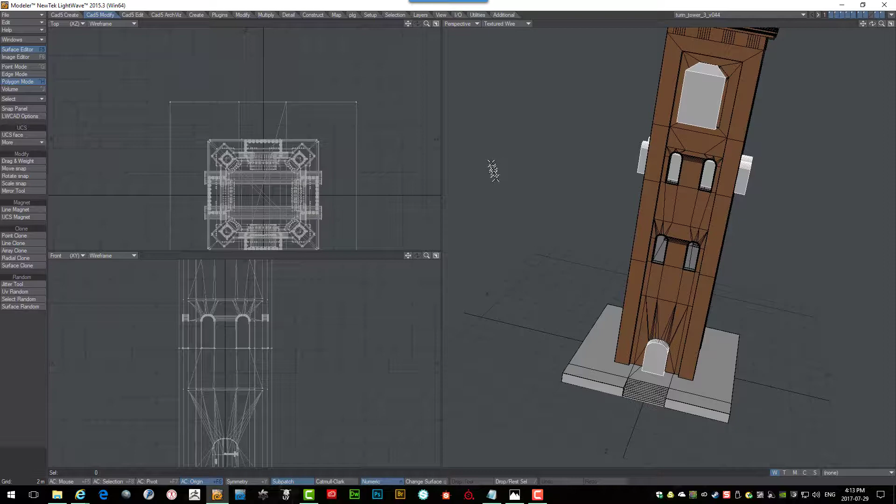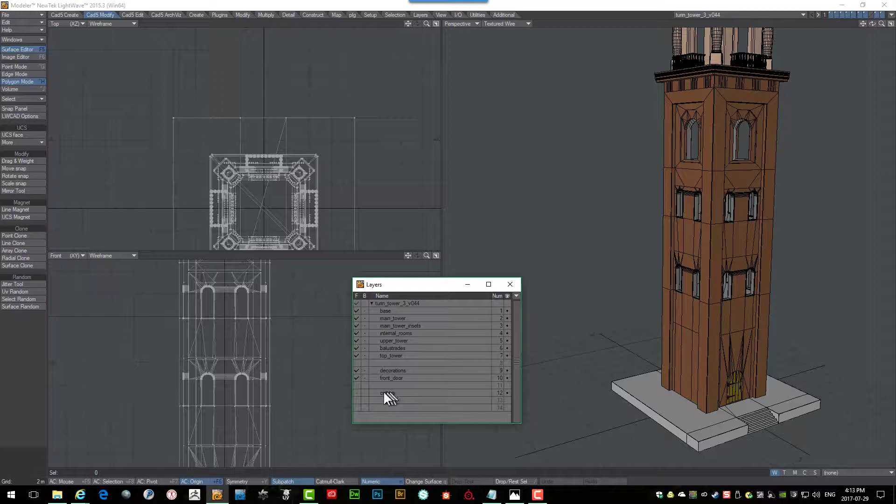Normally I work in the quad view, but for the display purposes of this video, I'm going to have the right side being a much larger vertical view here. And I'll bring my layers window over and turn off the cutters layer. So for those of you that don't know how Lightwave works, you can have these separate layers, very much like Photoshop, and we can cut pieces out of other layers using another layer. So I like to keep a layer of just my cutting objects, and I'll keep them around until I'm finished with the model and then get rid of this layer.

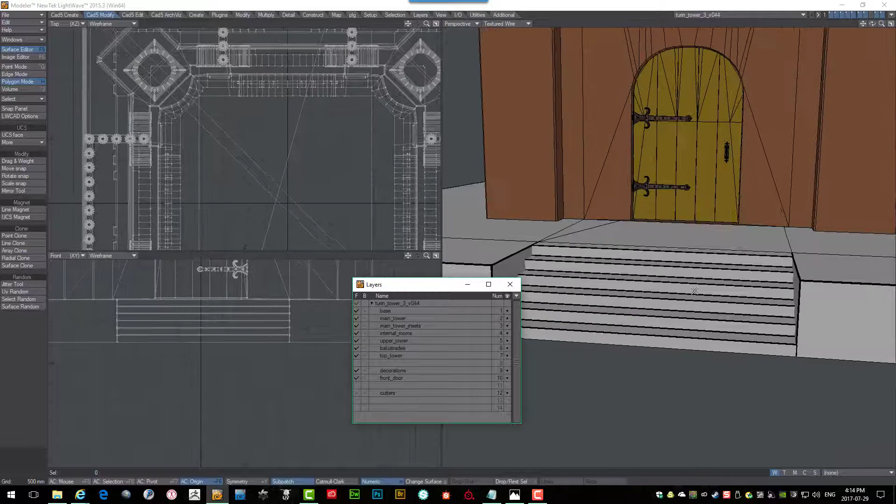So the base I just threw in there for kicks and grins. This is not faithful to the real world bell tower by any stretch of the imagination. The bell tower actually sits on the ground directly and has no base, and it doesn't even have a front door. So again, I'm taking a lot of liberties here. This base was primarily just to test the LWCAD stairs feature and the LWCAD rounding feature. So I've got these edges very tightly rounded, in fact far too rounded in my opinion. If I keep this at all, I'm definitely going to redo it and not have as many polygons here. But I digress.

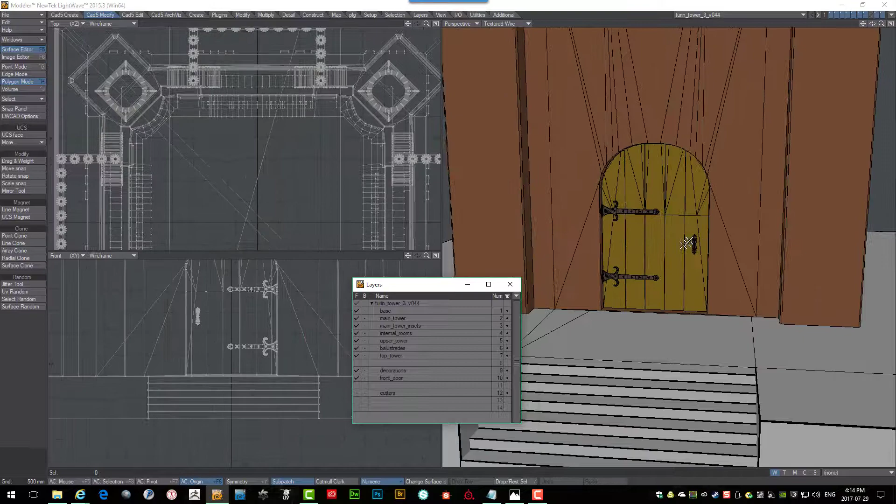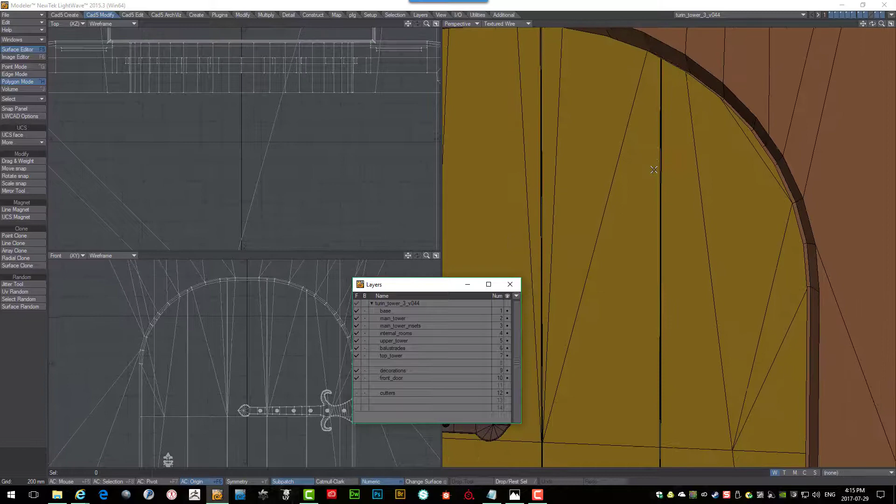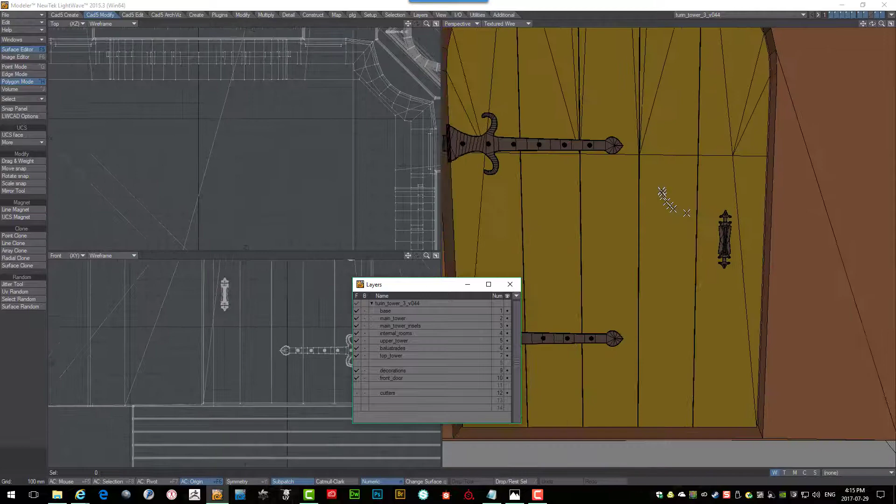The door was a fairly recent addition, just about a week and a half ago I've been working on this. Still needs a little more love and attention, but I did get a little extravagant here. If I zoom way in, this is actually modeled grooves. And I probably should just do a normal map when I do the texturing to get the grooves of the wooden planks in there. That would have saved a fair bit of work and certainly some polygons. But I've kept the grooves in there for now. And the door handle here and the strapping for the hinges has also increased the poly count fairly heavily.

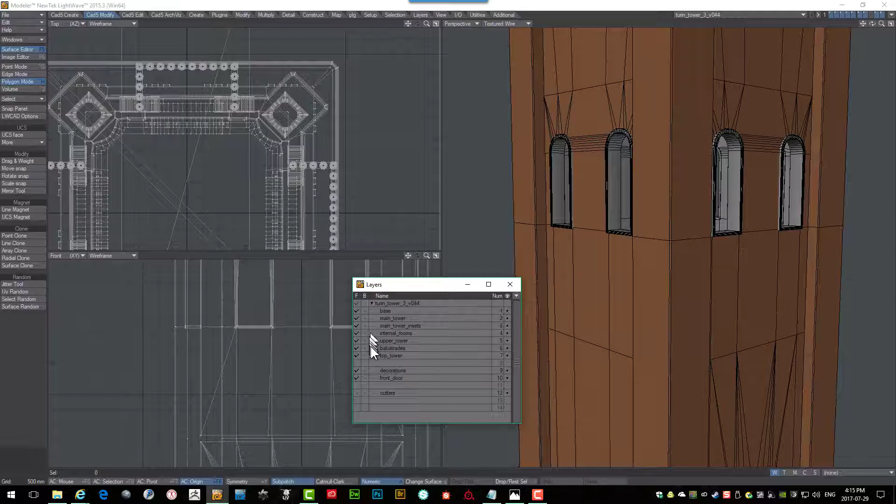So just moving up the tower. I don't know what the insides of the tower actually look like. For all I know, it's completely hollow. But in my model, I've built some internal rooms. And the idea is to actually put in some staircasing going up through these rooms until we reach the top. So we'll see how that works out. If that turns out to be too difficult, I'll probably just get rid of the rooms and just have a single staircase inside a hollow tower. But whatever, we'll see what happens.

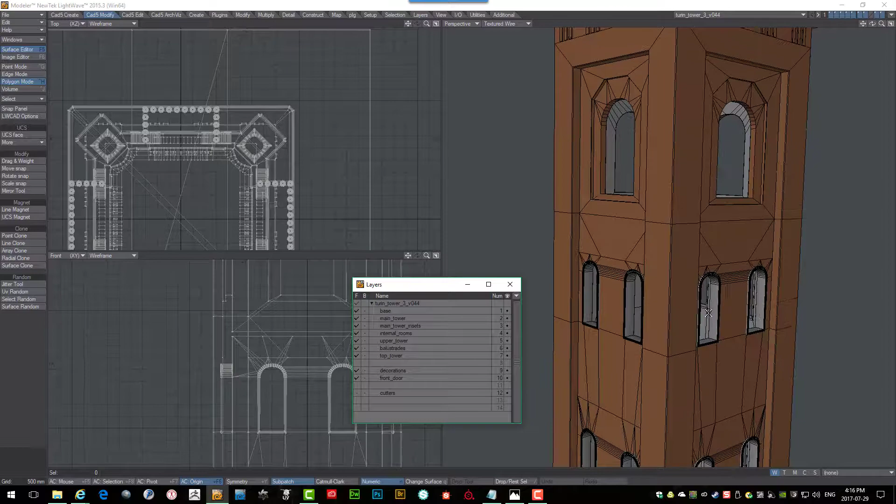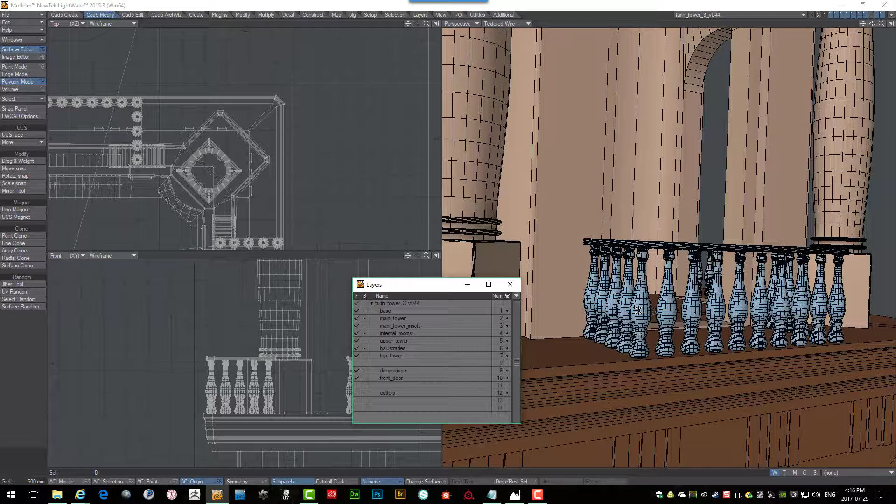Lately, most of my work has been here in the top part of the building. So I recently added some balustrades and railings. In my photo reference material, I found out these balustrades need a little more work if I'm going to more closely match the real world. So we'll see if I get around to doing that this weekend.

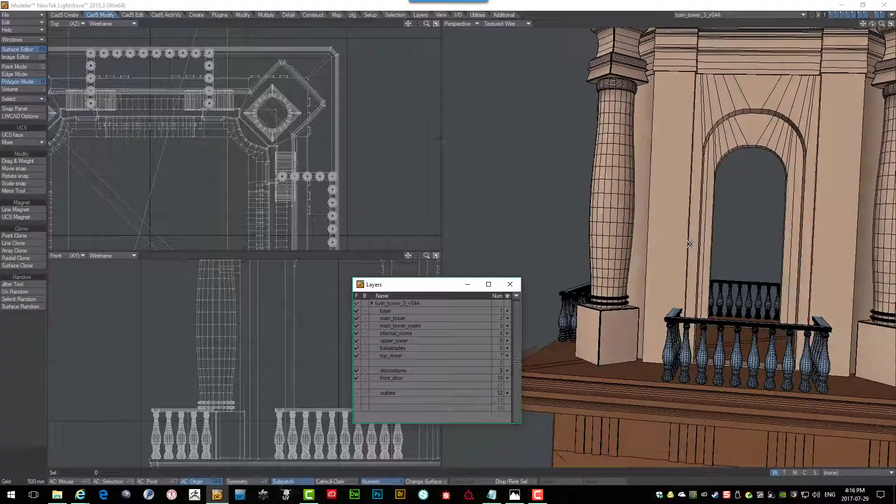Inside this large area here is where the bells and their support structures are. And I've had a heck of a time trying to find some good photo reference for that. So I'm not too sure how I'll go about modeling that.

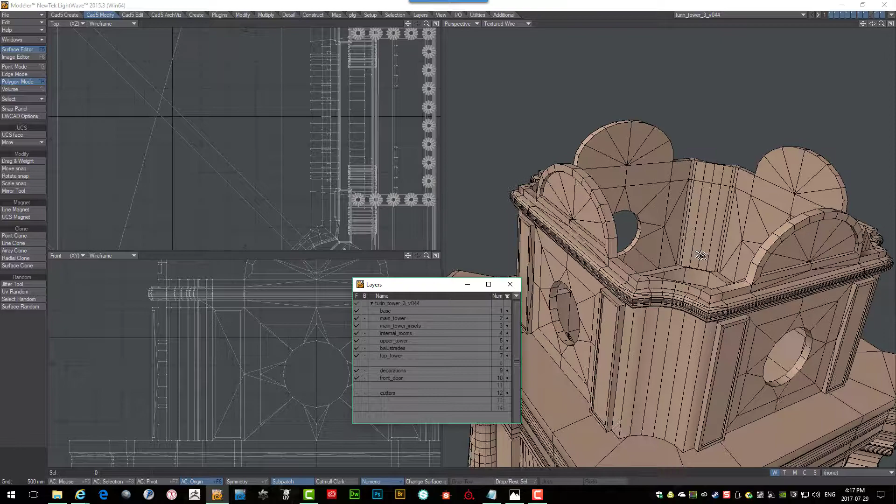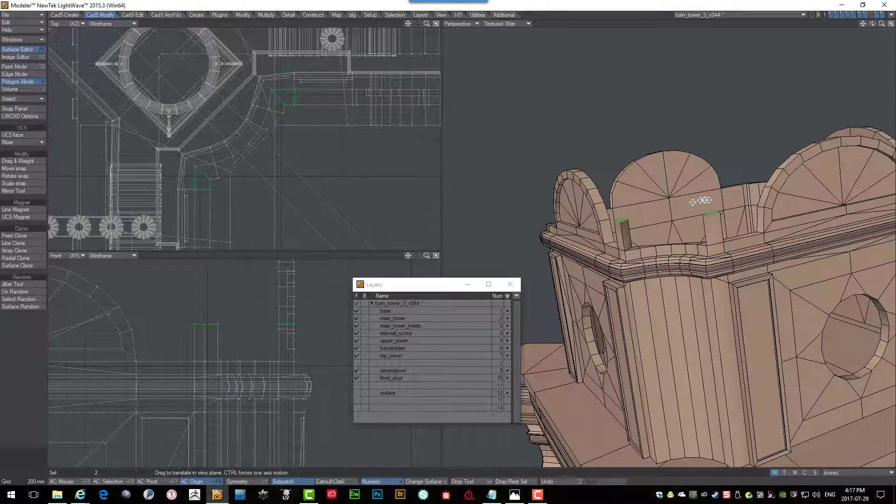And then lately, the last few days, I've been up here on the top part. I'm eventually working on getting the roof into place. The roof itself is pretty simple, but again, the photo reference material for this area is pretty scarce, and it's really hard to tell exactly what it looks like. To my best guess, the roof is actually supported on, well, if I were to say select these pieces here, and I'll just extrude them up like that. Basically, these corner edges support the roof almost like a tent top or something, and the rest is actually open air. That's what it looks like, but it's very hard to tell exactly what's going on. So I'm going to continue doing a little more research on that before I finish off the roof.

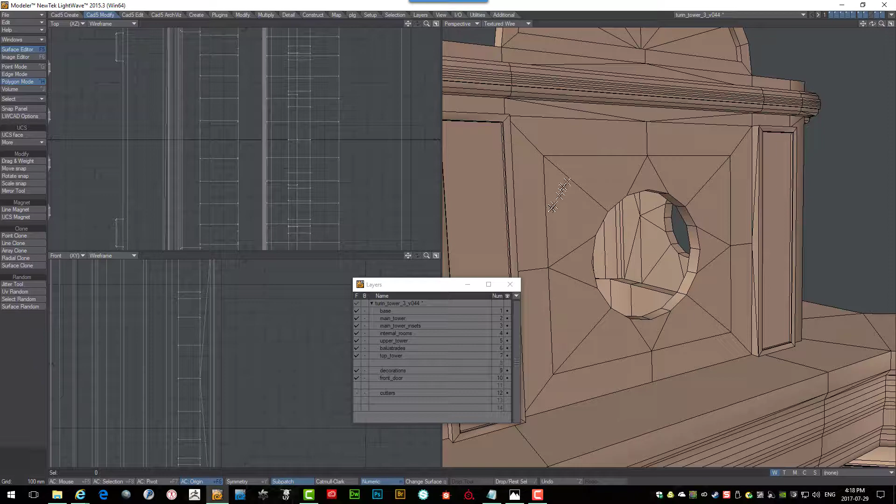One thing I did want to mention about Lightwave, some of the tools that I've forgotten about lately I've kind of returned to. I've got a new sense of appreciation for them. The line pen tool helped me cut up this geometry and make it a much nicer and more symmetrical geometry rather than taking the Boolean cut n-gon and just triangulating it in Lightwave, which is very easy to do, but it produces some really ugly geometry. So instead I kind of cut it up myself and tried to stick as much as I could to building quad only geometry here. So if I bring my polygon stats window over, I'm at just over 50,000 polygons, and the vast majority of them are quads.

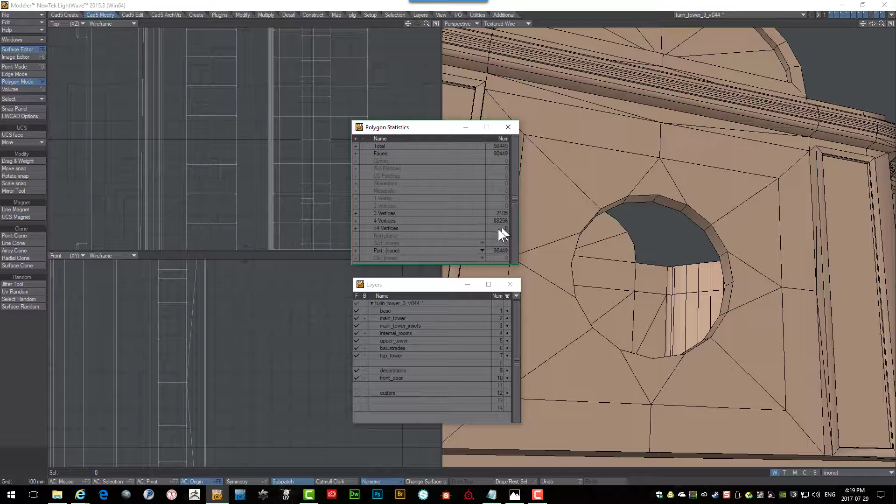The remaining n-gons are actually those internal rooms. The floors and ceilings are the n-gons. So we'll see if that ends up staying or not. After I finish modeling in those stairs, they'll be quite different, so I'm kind of saving that for the last. I'm not fixing these remaining n-gons until then.

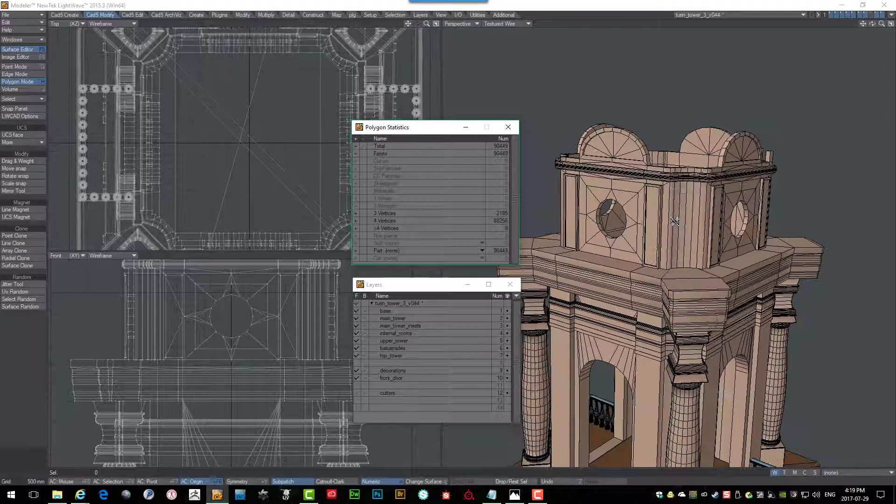So that's about it. I'm nowhere near done. Well, getting there. I'm getting towards completion. And then comes the fun part of UV mapping this beast. A lot of it is planar here, being basically a box tower, but we'll see how that goes, and I'll do a video on that, I'm sure, and add that to the UV layout tutorial section of my channel.

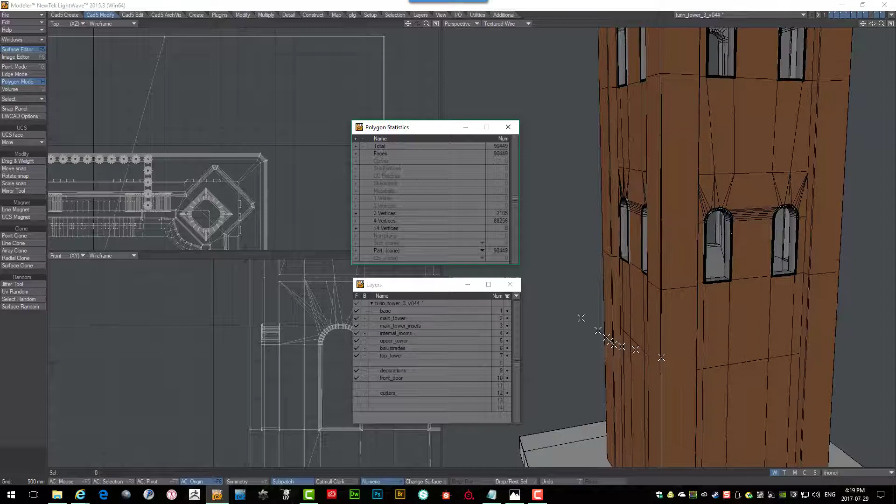So I hope you found this interesting, and just kind of let you know what I've been up to. I haven't given up on 3D. It's just been very slow going lately.